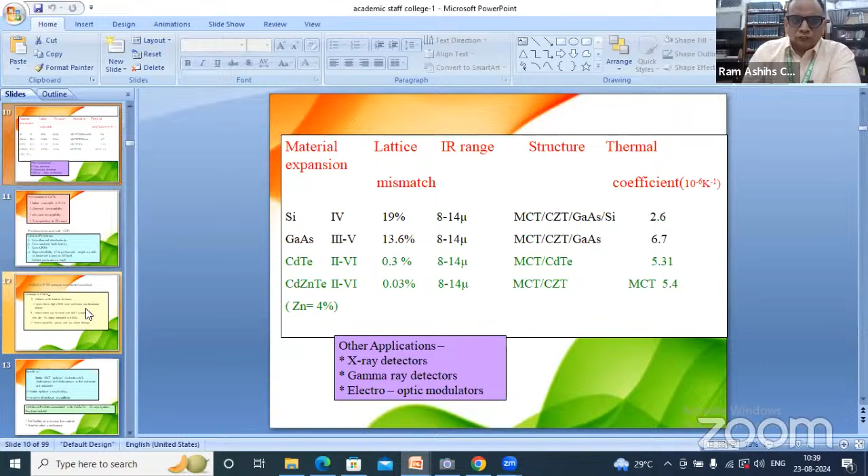Advantage of cadmium telluride is that the lattice mismatch is 0.3%, it is chemically and physically compatible, and it is transparent in the IR region. The problem associated with cadmium telluride substrate is low thermal conductivity, low stacking fault energy, low critical resolved shear stress, and reproducibility is the main issue. And large diameter single crystal or large grain size is the main impediment of the growth technique.

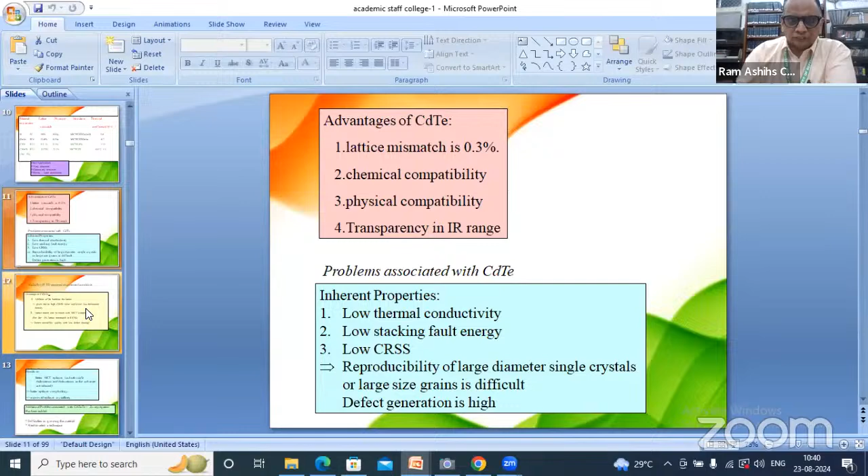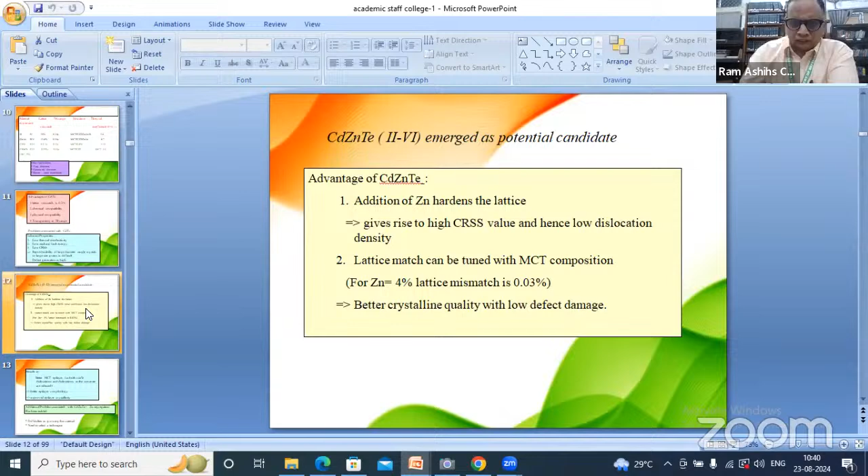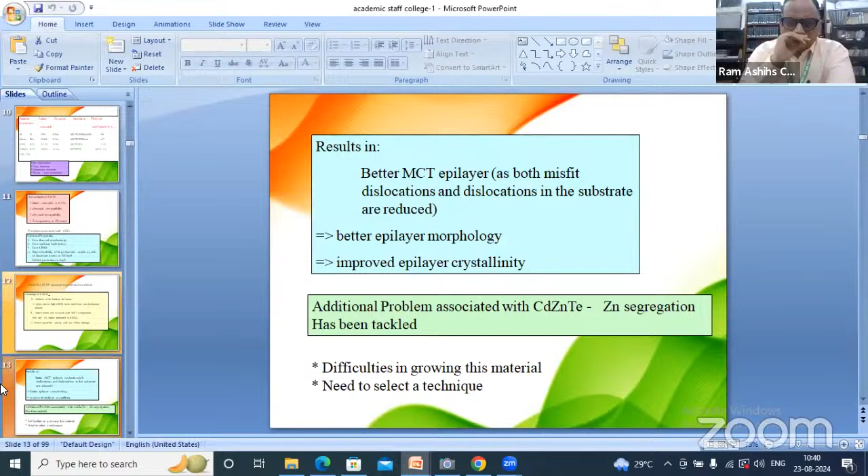Nowadays, cadmium zinc telluride emerged as a potential candidate for the substrate material. Here, zinc with 4% is suitable for MCT epitaxial layer growth, and this gives us better crystalline quality with low defect density. And zinc segregation is resolved with uniform distribution through in situ annealing of the crystal during the growth process.

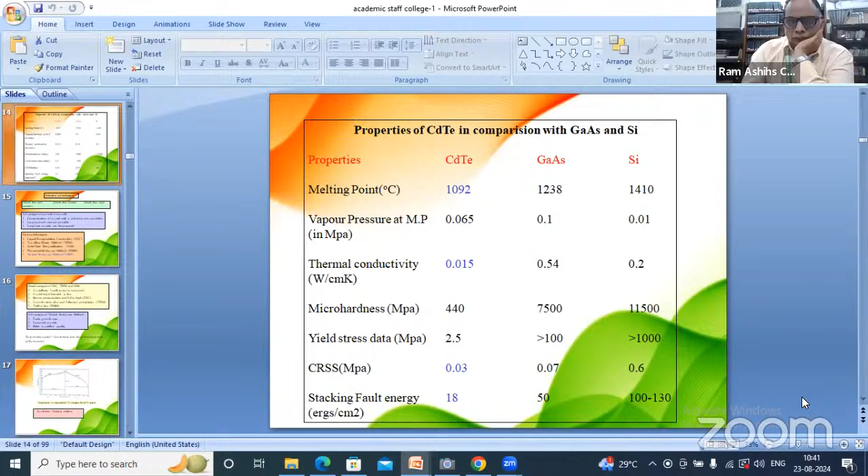These are some parameters of the cadmium telluride, gallium arsenide, and silicon crystal. Now, these are the advantages of growth from melt. Contamination of the crystal with solvent is not a problem, and large growth rates are also possible. Large size crystals can be prepared with this technique, and other techniques are the liquid encapsulated Czochralski method, traveling heater method, and solid state recrystallization method.

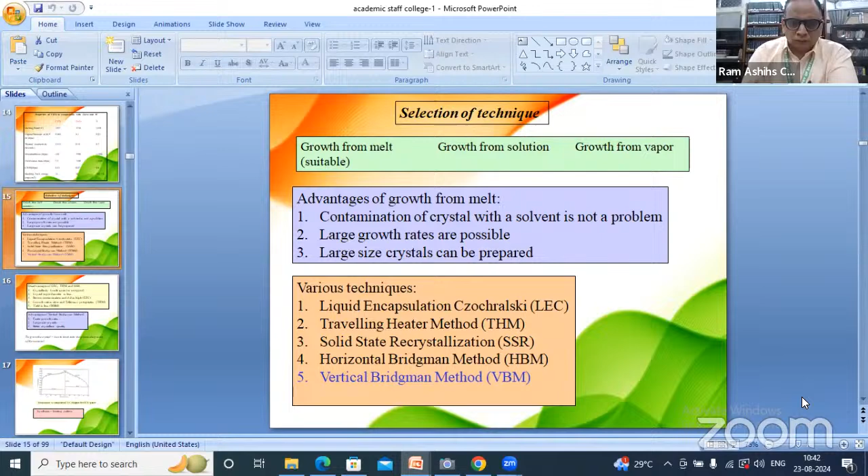In Bridgman method, two methods are there: horizontal Bridgman and vertical Bridgman. For large area grain or single crystal purpose, we are using vertical Bridgman method as a unidirectional freezing method. Other methods for CZT, LEC, traveling heater method, and SSR method, crystalline quality is not good. Crystal ingot diameter is less. In Czochralski method, the boron contamination is very high, growth rate is very slow, and tellurium precipitate is there. And horizontal Bridgman method has half the yield because of the diameter of the crystal.

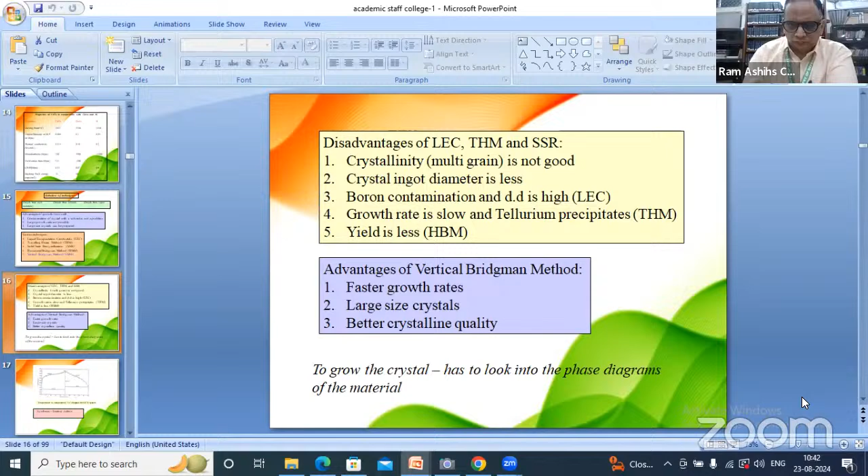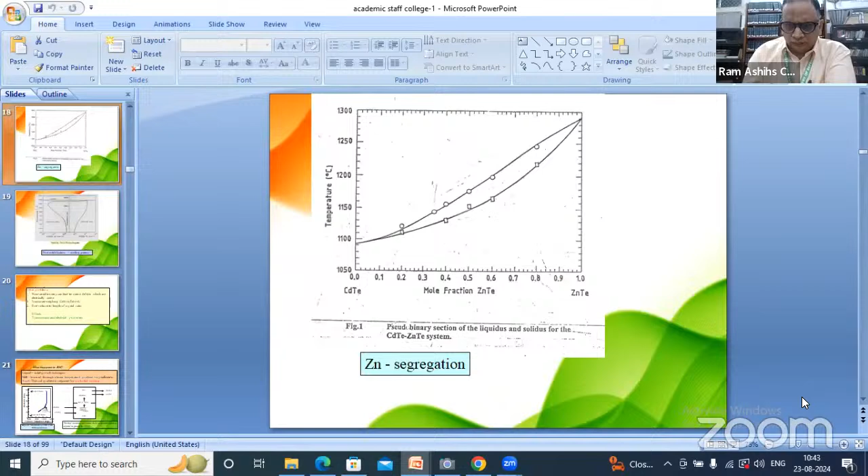Advantage of vertical Bridgman is the faster growth rate, larger size crystals, and better crystalline quality. This is the phase diagram of the crystal growth technique where thermodynamics study is required. This is the theoretical phase diagram of the pseudo-binary section of the liquidus and solidus for the cadmium telluride and zinc telluride system. This is the post-solidification cooling pattern.

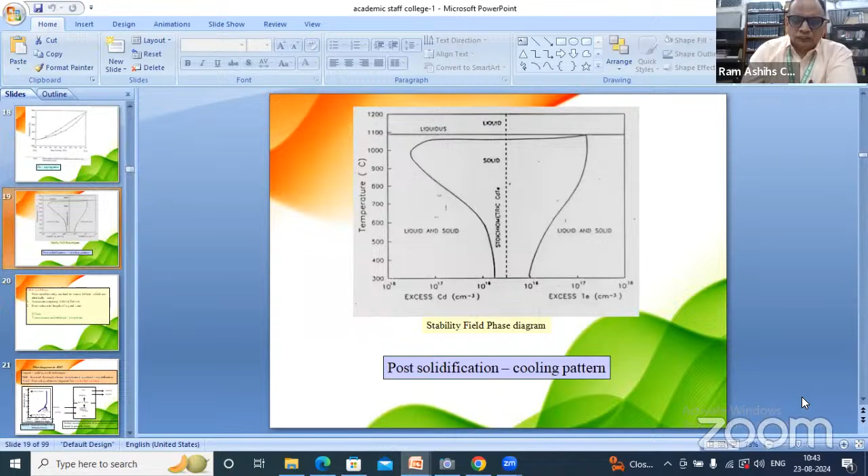By these three theoretical things, we optimize our parameters, and with these things we grow the crystal. This is the required thermal profile of the furnace, and from constant zone to gradient zone we are moving from top to bottom.

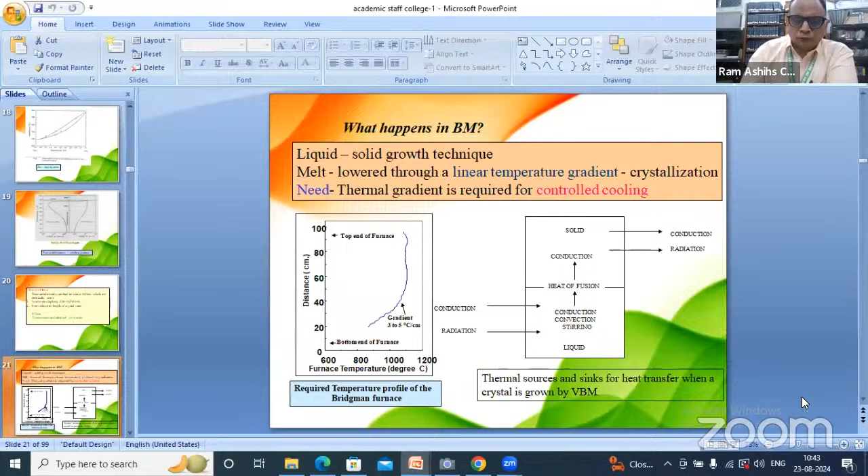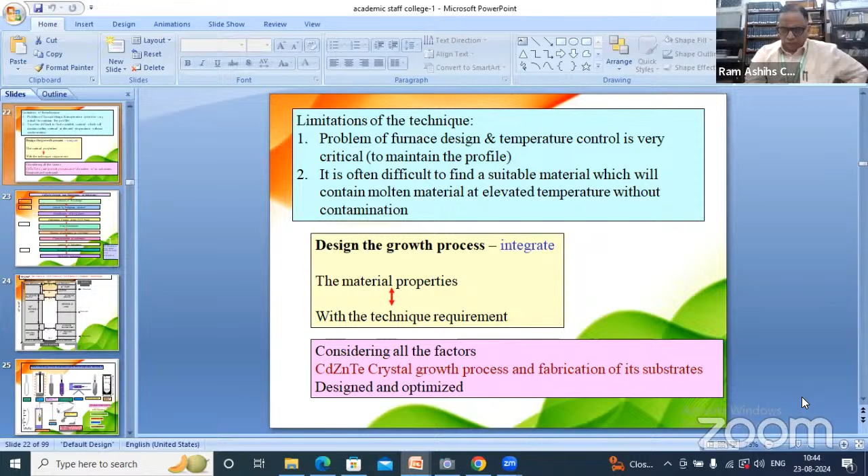Limitation of this technique: furnace design and temperature control is very critical. It is often difficult to find a suitable material which will contain molten material at elevated temperature without contamination. And design of the growth process depends on the material property and technique requirement. Considering all these factors, the CZT growth process and fabrication of substrate are designed and optimized. The procedure is very lengthy for this crystal growth.

Synthesis of polycharge: we are using 7N pure cadmium, zinc and tellurium, and the selected method is Bridgman method. After crystal growth, identification of the 111 plane and orientation cutting along the 111 plane. We are using X-ray goniometer for plane identification. Then shaping of substrate by required size. Earlier we were using 15 by 15 and now 25 by 25 is required for device application. And substrate preparation by lapping, polishing, and epi-ready preparation of substrate for epitaxial growth.

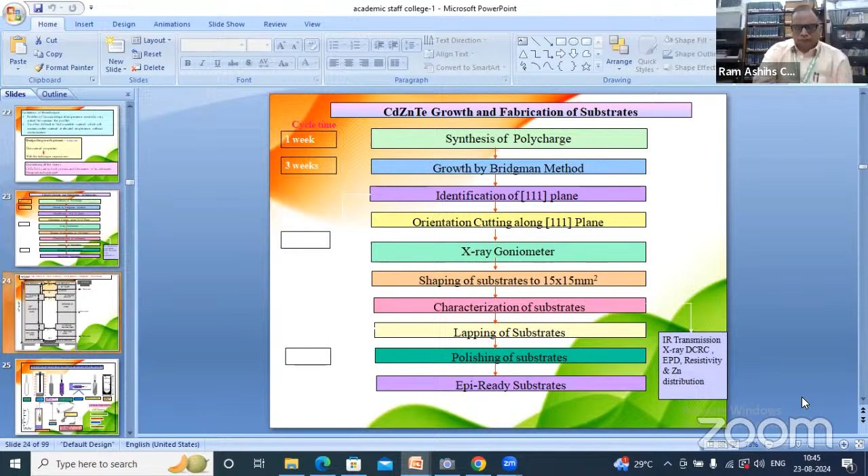This is the design of the old furnace used in the crystal growth process. We have taken a quartz ampule and we do carbon coating in a furnace at 900 degree temperature by cracking of acetone. It is done to avoid the sticking of high purity material with the inner surface of the quartz ampule.

After carbon coating, we do degassing of this ampule, and then we weigh the charge cadmium, zinc, and tellurium with zinc 4% stoichiometrically, place this charge in the ampule, and seal it. After this, we put it in a rocking furnace for 5 days, and after attaining constant temperature, we rock this furnace for mixing the charge.

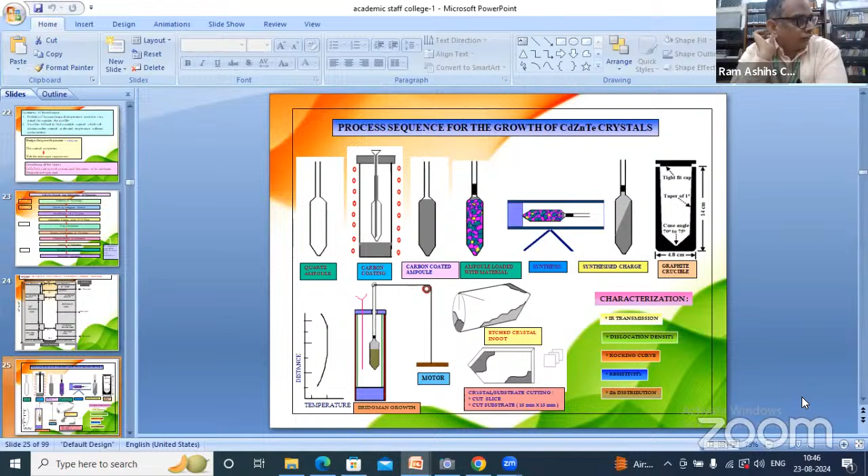This is one experiment. We grow this crystal in a quartz ampule and in a graphite crucible, and nowadays we are using PBN crucible. We were growing in graphite crucible, but carbon contamination is there. Now PBN crucible is giving very good results for the device purpose.

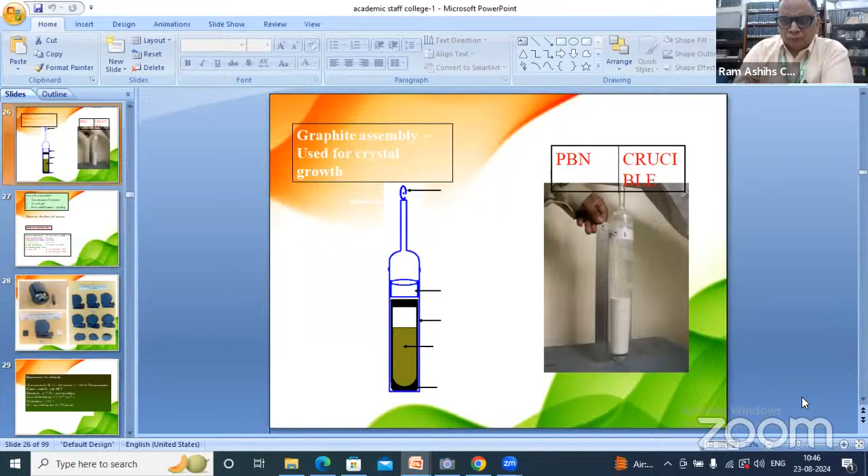This is the structure of PBN crucible for growth purpose. Now the growth parameters, temperature gradient, travel rate, post-solidification cooling, and furnace diameter are given here. Ampule diameter is 45. Temperature gradient is 3 to 4 degrees centigrade. And after lowering, in situ annealing is done at 1040 degrees centigrade for 5 days.

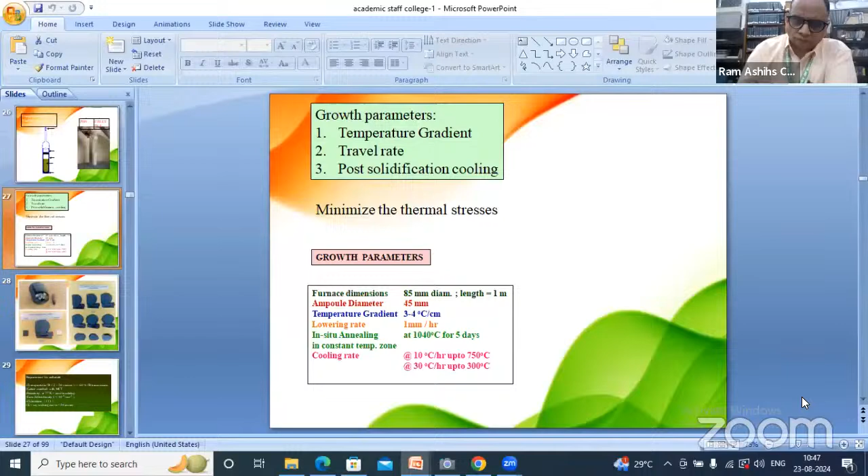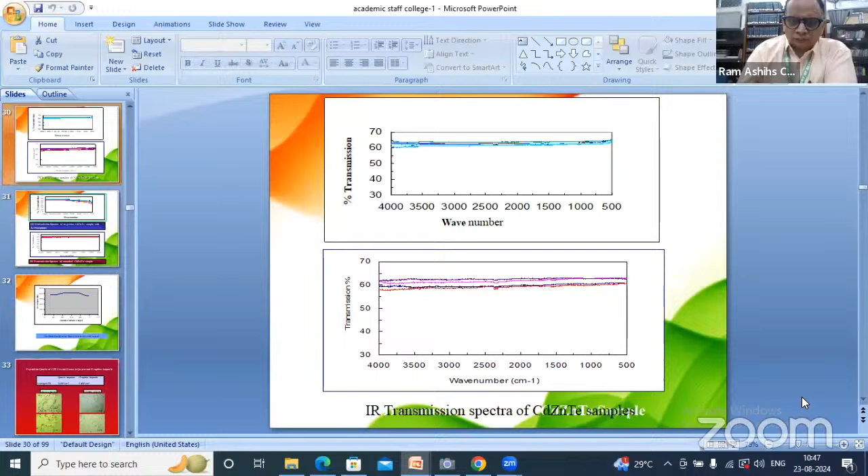This is the requirement of substrate materials. This is the transmission, because this is used in backside illuminated devices. The transmission requirement is 60%. So our substrates are qualified for this transmission requirement. If transmission is hampered, after annealing we correct this transmission.

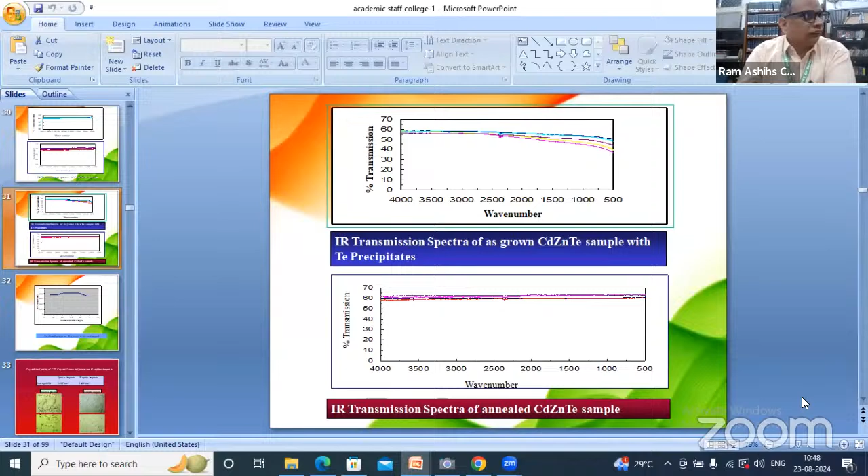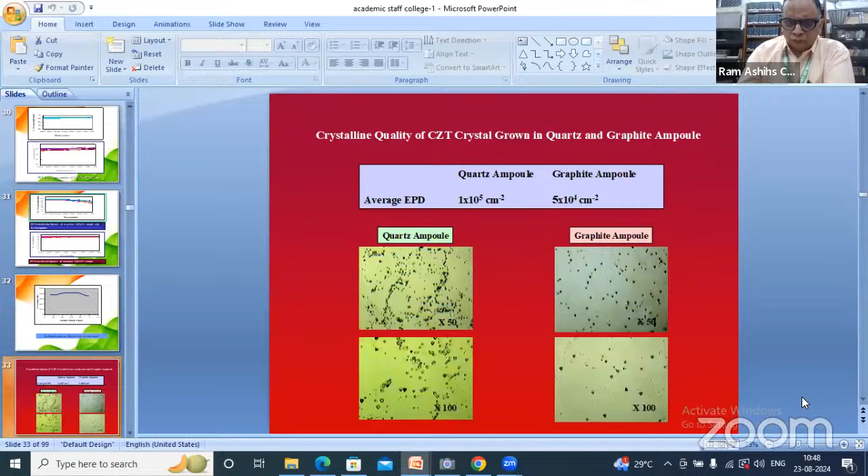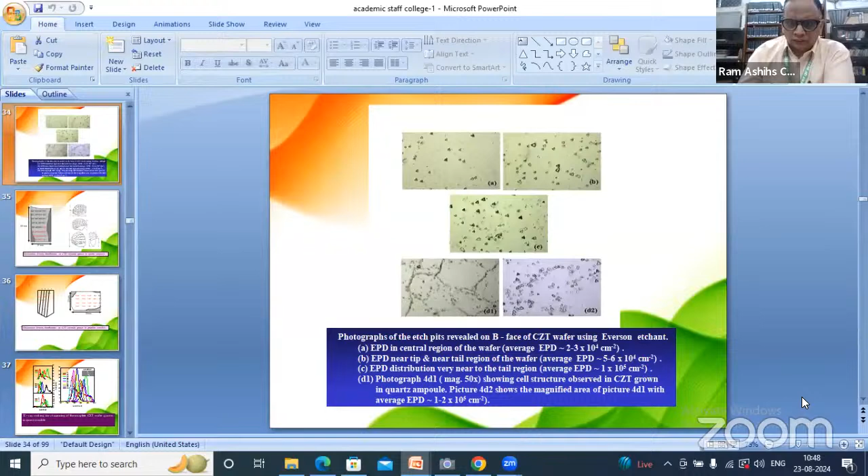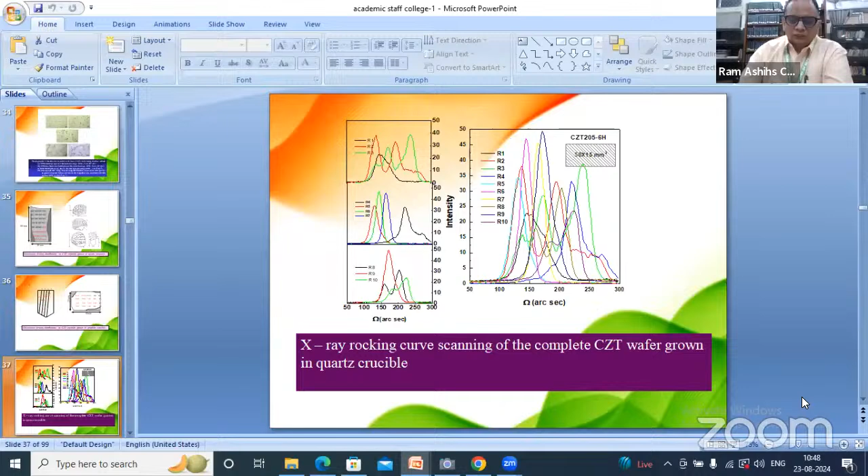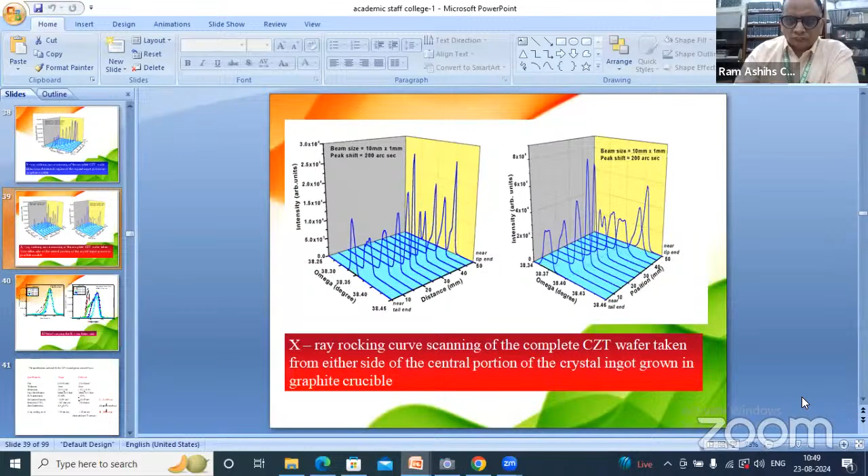This is the X-ray rocking curve. The physical significance of the splitting of X-ray rocking curves is the low angle grain boundaries present in the substrate in one region. This is the perfect single crystalline quality. This is a different beam size, and the splitting, the multiple peaks, shows the tilted low angle grain boundaries present in the substrate. These are also analysis.

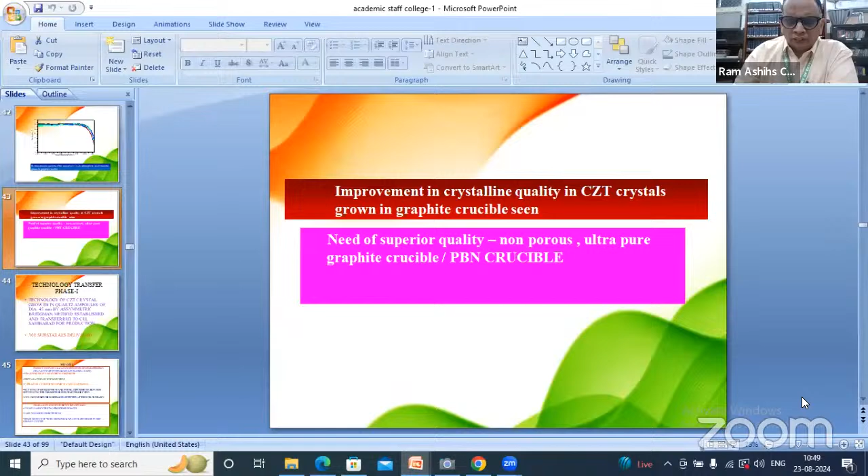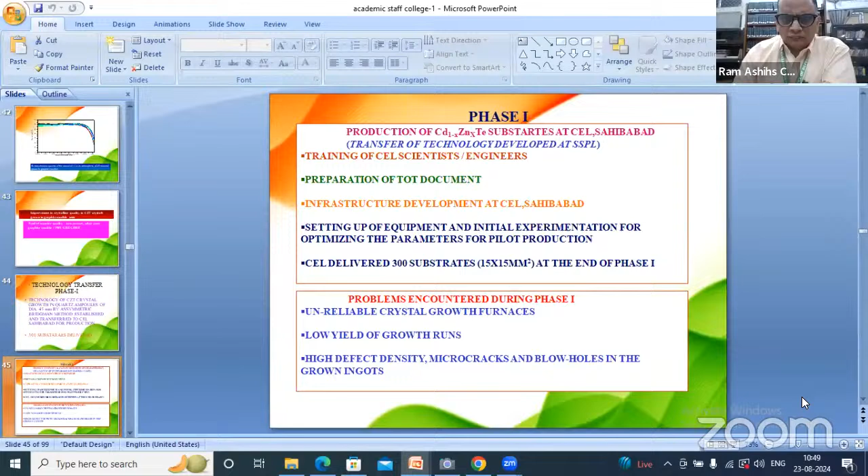For improvement of the crystalline quality, we are using nowadays PBN crucible. This technology we have transferred to the Central Electronics Limited, Sahibabad, and in two phases we are changing the technology of the diameter of the crystal, and nowadays we have transferred the technology of growth of CZT substrate in PBN crucible.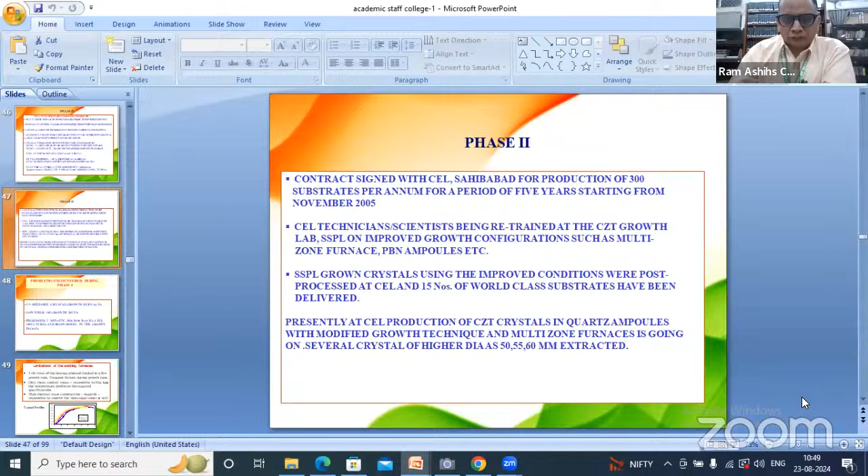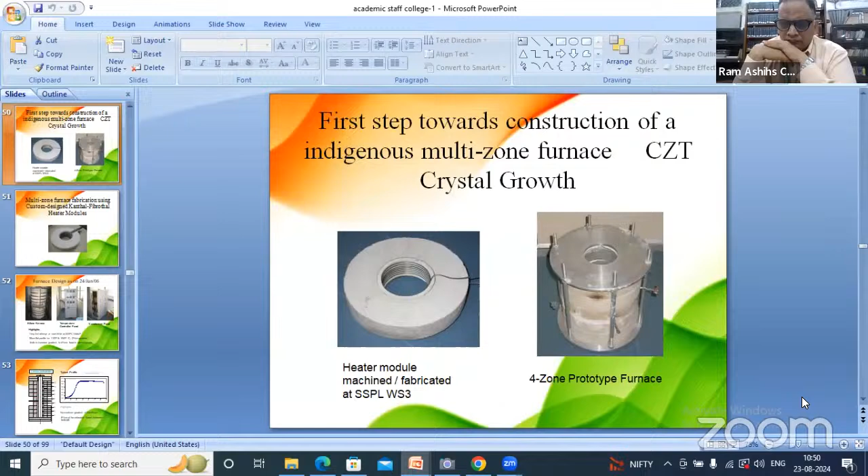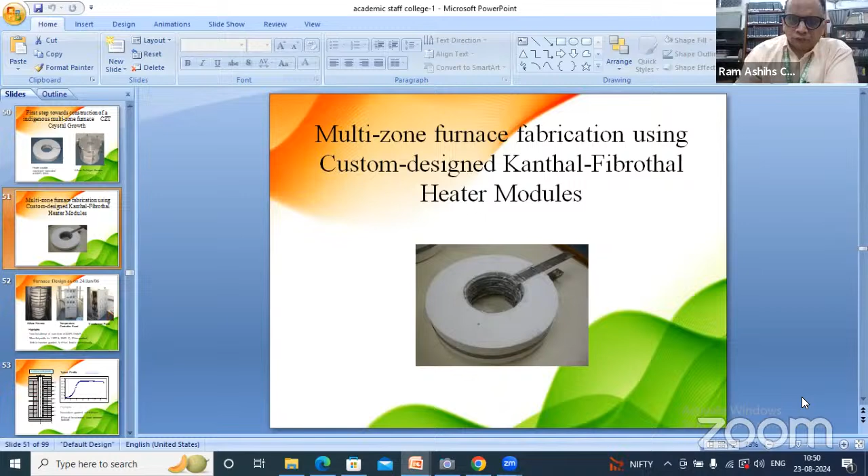For the temperature requirement, the first step is the construction of an indigenous multi-zone furnace. This is the heater module, which nowadays we made from Kanthal Fibrothal module and Kanthal wire. And this is the 1-zone and this is the 3-zone furnace, a 4-zone prototype furnace we made. For multi-zone furnace, this prototype works. Then we optimize the parameters, and this is one module of Kanthal Fibrothal heater module we made.

By using 9 such modules, we made a multi-zone furnace, a 9-zone furnace, with in-house temperature control panel and transformer panel here. So the furnace problem is minimized, and this gives the required profile. It is done because we are not getting the Bridgman furnace from the US and other countries because of the sanctions. And this is a strategic material, so people are not giving support or providing the infrastructure for this activity.

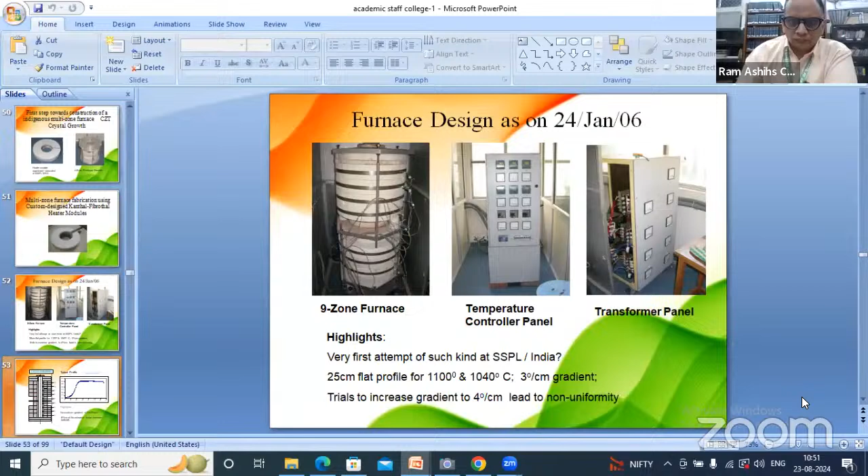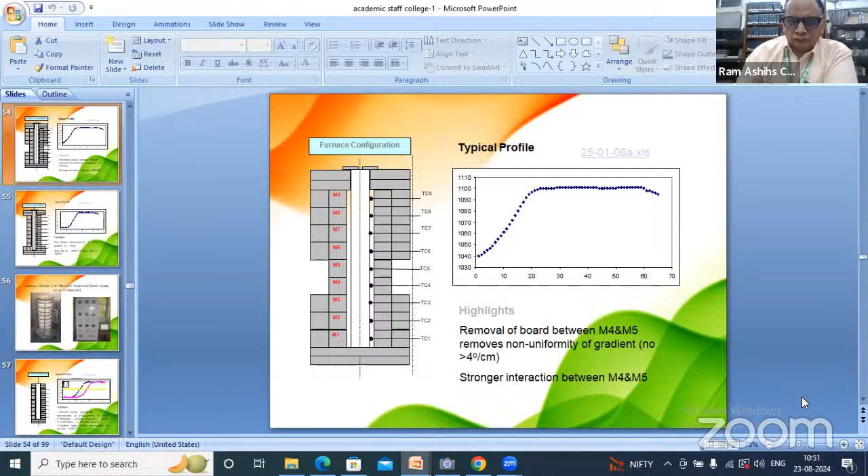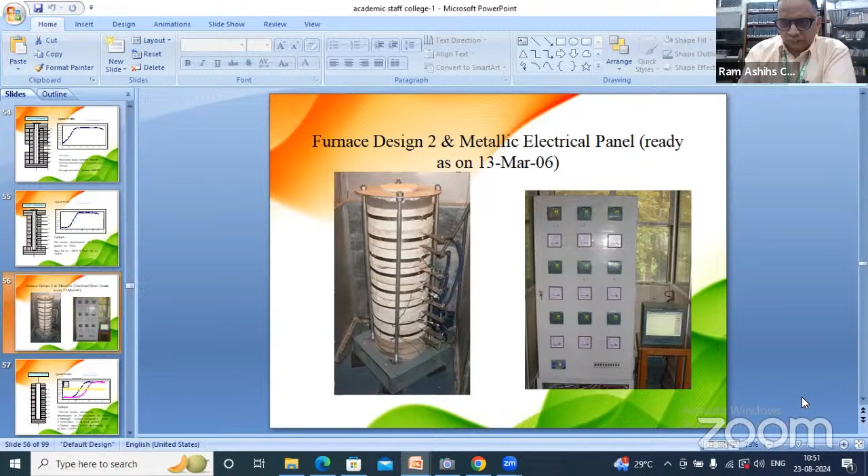This is the block diagram of the 9-zone furnace, and the temperature profile is there. This is also a temperature profile, constant zone and gradient. This is the final design. There is a low thermal mass of the external bodies. By this design, we transferred the technology of furnace fabrication to the Central Electronics Limited, Sahibabad.

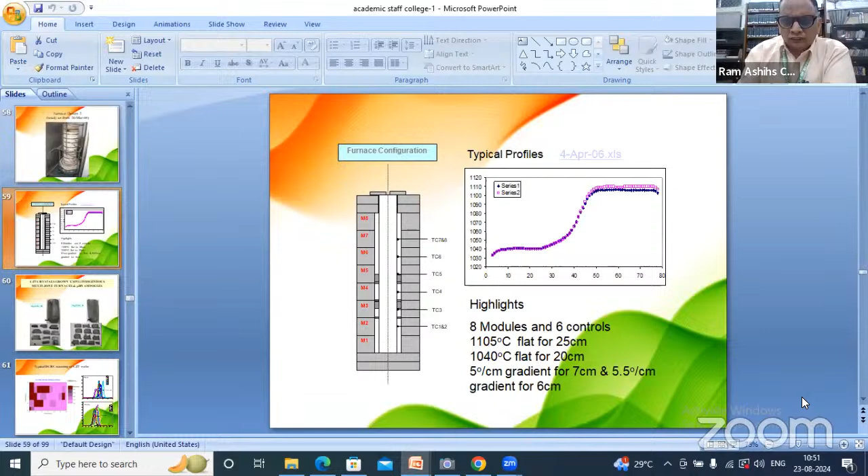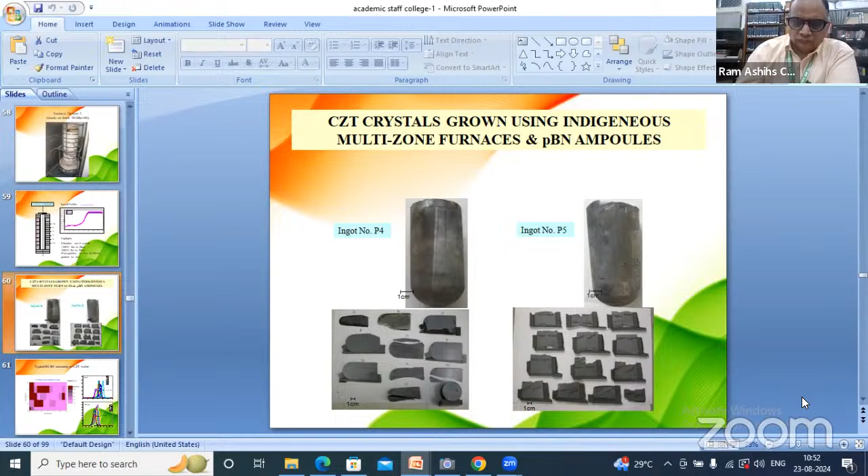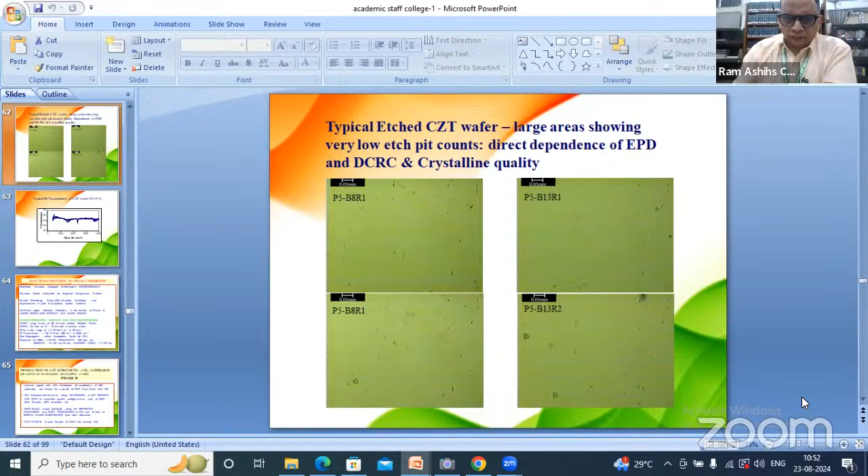These are the characterization results.

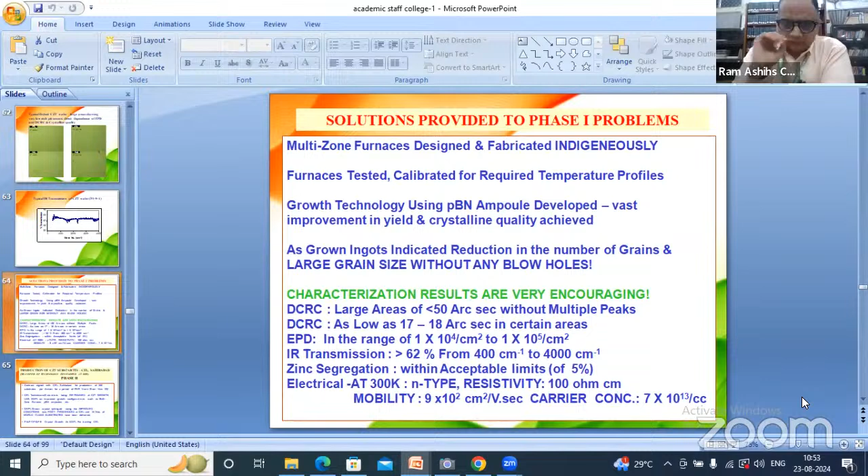Now the contract is signed with Central Electronics Limited, Sahibabad, for 5 years and 300 substrates per annum. We are the user because SSPL is the semiconductor lab. We have developed the technology and transferred it to Central Electronics Limited.

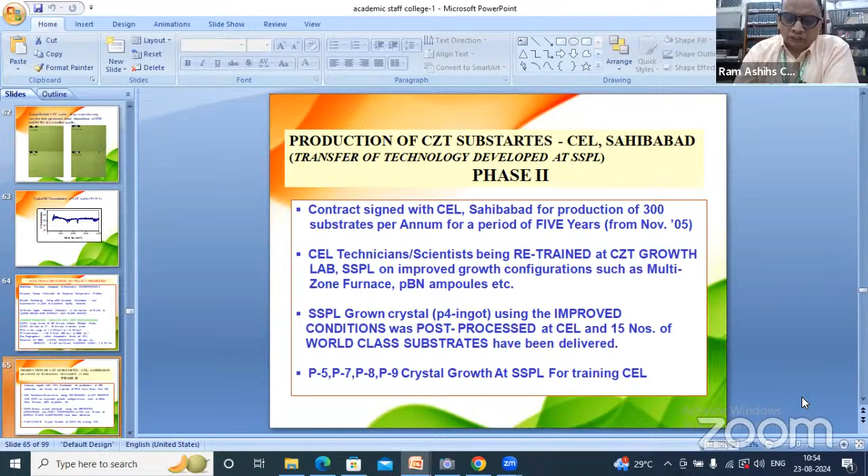Further, large size PBN growth is carried out, and Central Electronics Limited production started in Quartz Crucible with large diameter also, for optimizing the parameters. Action is also taken for setting up two multi-zone furnaces for large diameter CZT crystals.

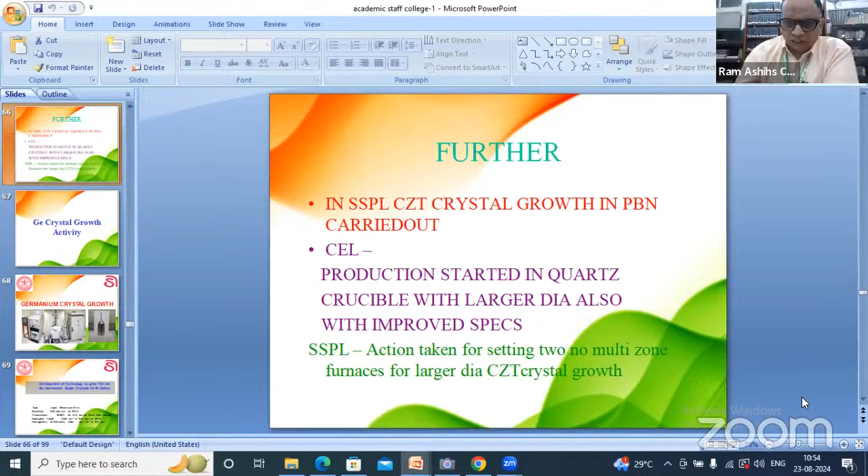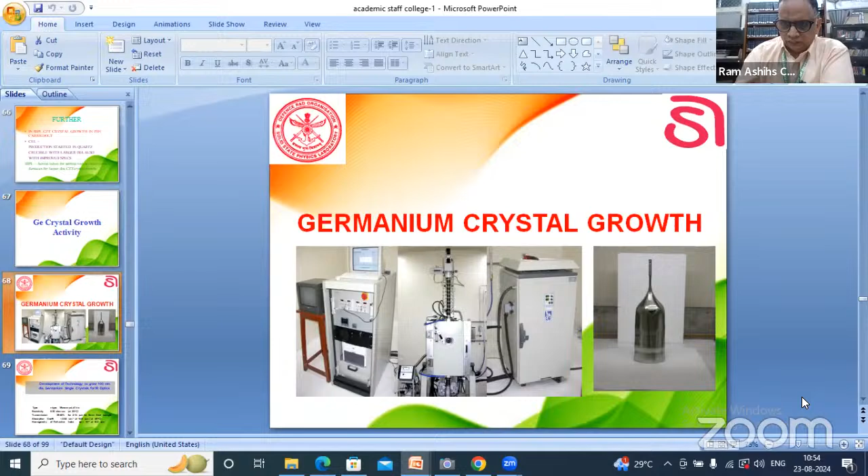Now the other activity is gallium arsenide crystal growth. For space applications, we are growing gallium arsenide crystals.

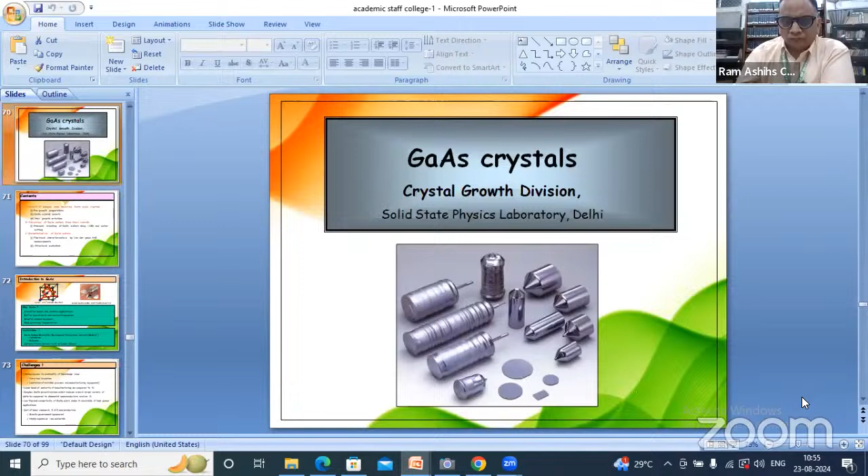The growth of undoped semi-insulating gallium arsenide crystals requires pre-growth preparation, gallium arsenide crystal growth, and post-growth activity, including fabrication of gallium arsenide wafer from the crystal, because it is a huge crystal.

So precision orientation of the gallium arsenide wafer along 100 and wafer cutting is required. The characterization of the gallium arsenide wafer, electrical characterization and structural characterization, is done at SSPL.

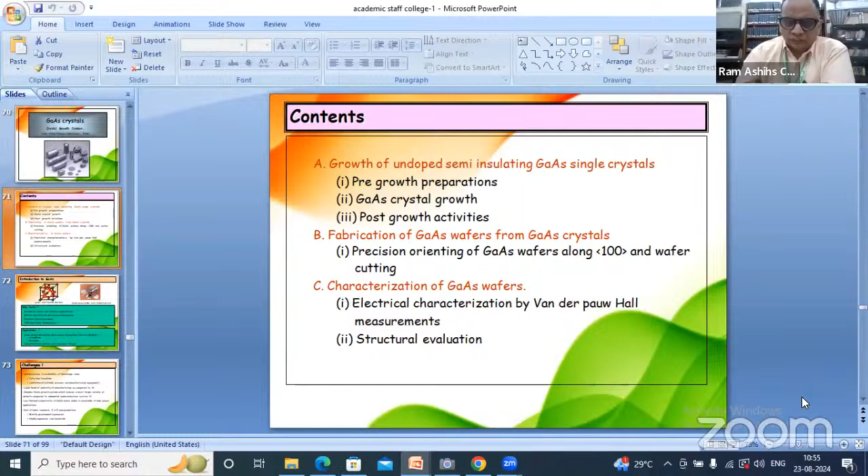Gallium arsenide is crucial for space and military applications: better operational microwave frequency, greater computing speed, and high operating temperature. The application is the gallium arsenide based MMICs used in satellites and missiles.

The devices made by SSPL and produced by GAETEC Hyderabad are used by ISRO in their space program. We have some commendation certificate from ISRO also.

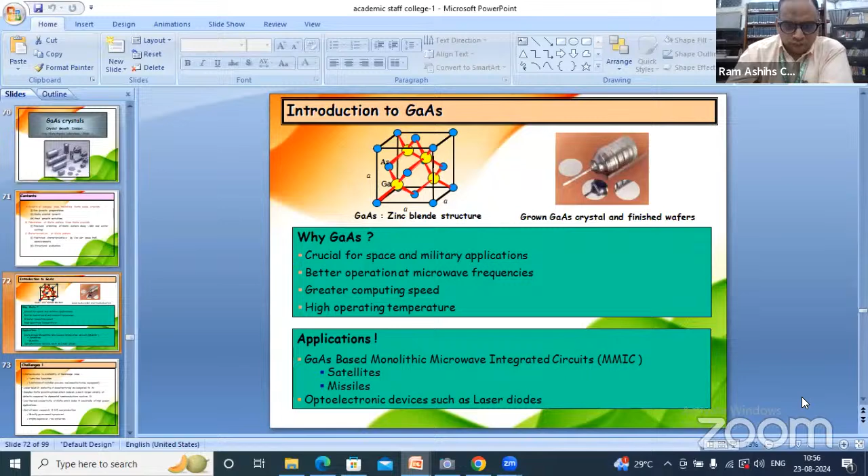Now the challenges: limited access to knowledge with very few foundries available, limitation of suitable process and manufacturing equipment, and low level of maturity of manufacturing as compared to silicon, because silicon foundries are very much available in India.

For gallium arsenide crystal growth, a complex growth system is required, inducing a much larger variety of defects compared to elemental semiconductors such as silicon. Low thermal conductivity of gallium arsenide makes it unsuitable for high power applications.

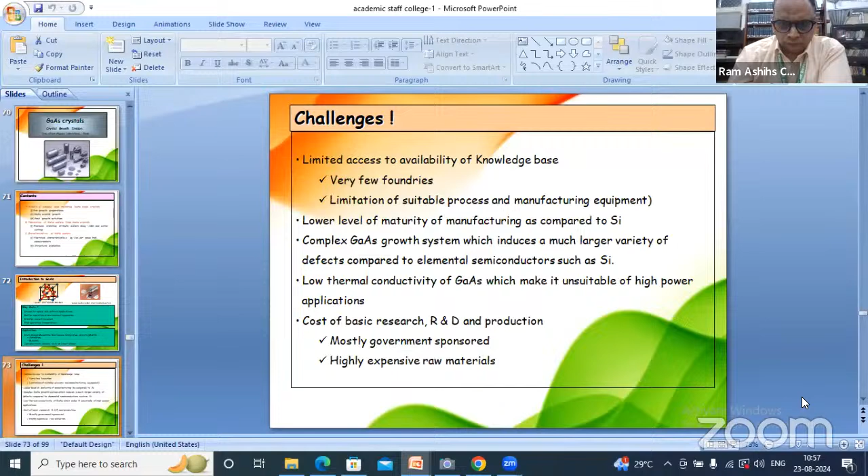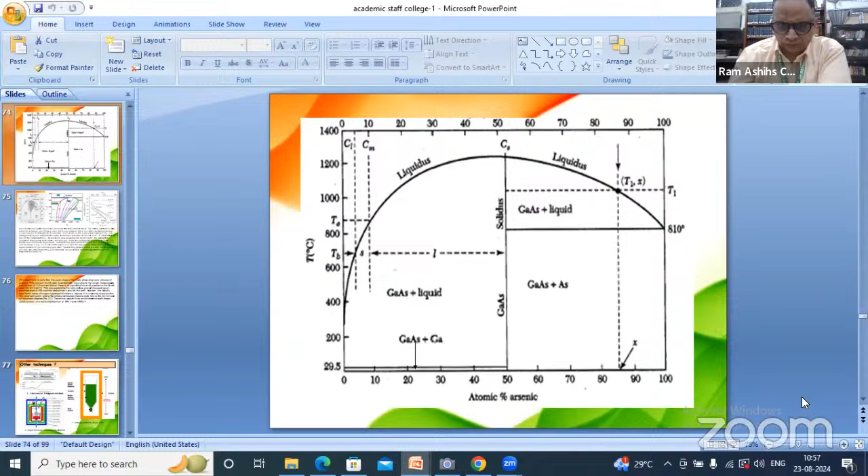Cost of basic research and R&D is mostly government sponsored, and raw material is highly expensive. This is the textbook diagram of the gallium arsenide crystal.

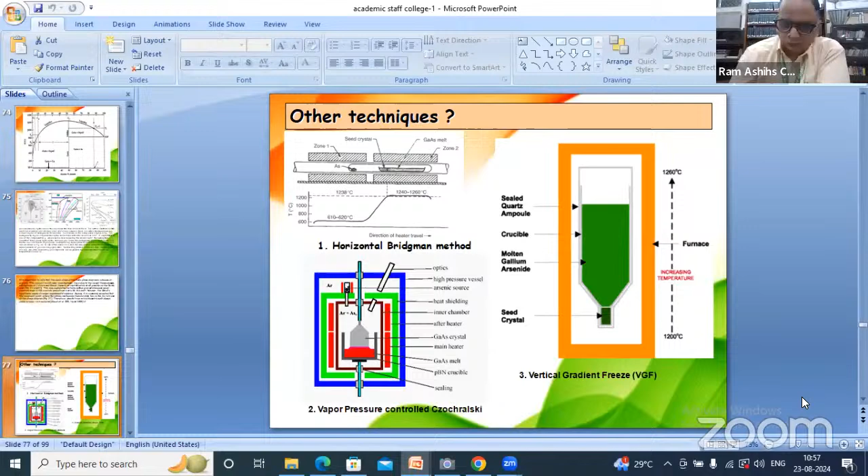Other techniques for gallium arsenide are horizontal Bridgman and vertical gradient freeze method, and vapor pressure controlled Czochralski method. Nowadays we are using the Czochralski method for growth of gallium arsenide crystal.

Gallium arsenide activity flow chart: crystal growth, then wafer fabrication and wafer characterization, and we submit this wafer to other sections for device fabrication.

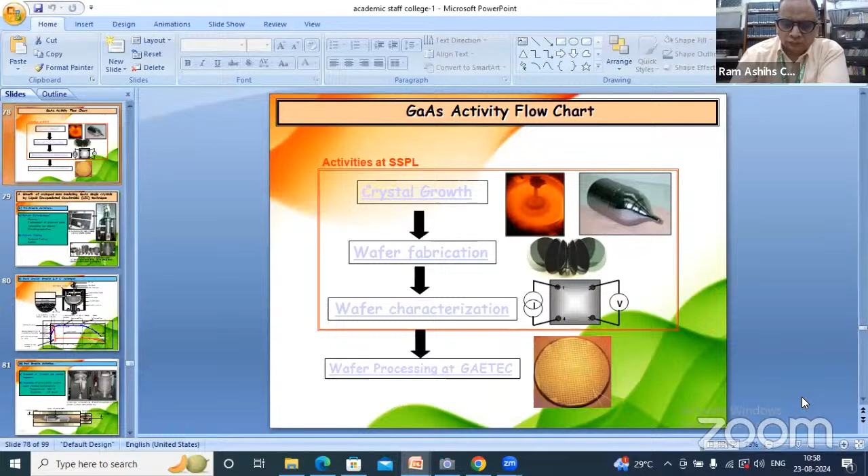This is the Czochralski growth furnace for gallium arsenide, and graphite furniture is also used for the inner part of the furnace.

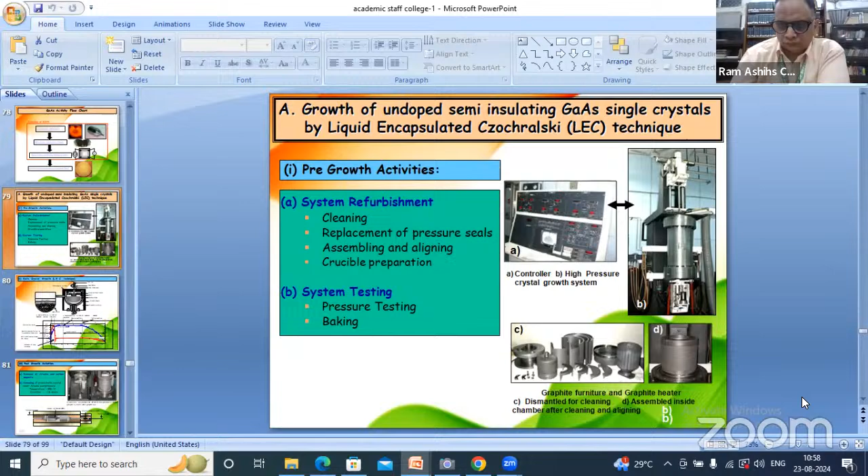This is the gallium molten and arsenic solid, with B2O3 solid, and by rotating and using the seeding technique, we grow the gallium arsenide.

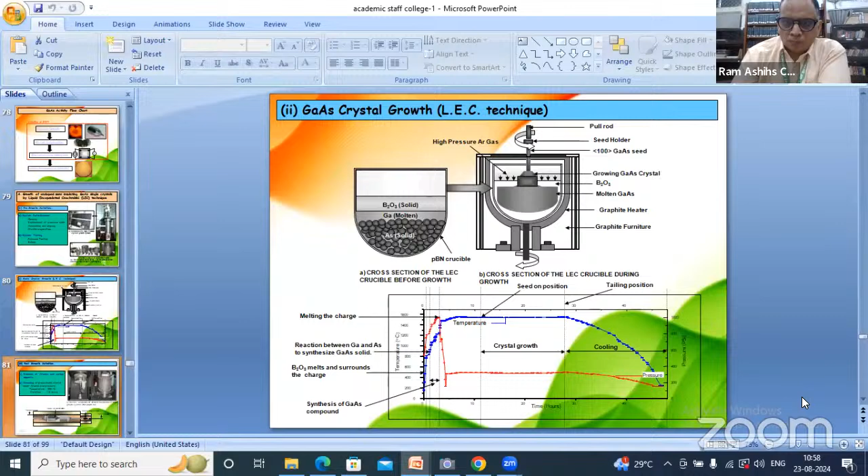This is some other part of the crystal growth furnace. This is the ingot, the grown crystal.

By orientation using the X-ray goniometer, in the 100 plane, we do cylindrical grinding and flat orientation, flat identification and flat grinding. Then wafer cutting, edge rounding and lapping polishing, and then finished wafer for further use.

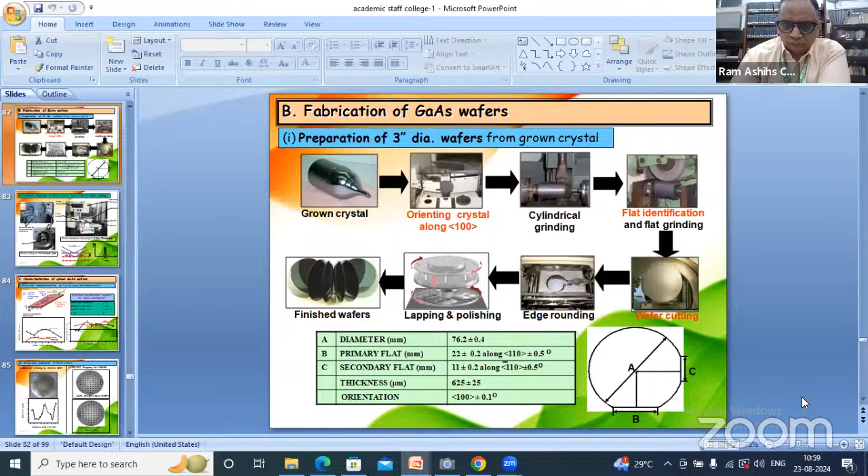This is the precision orientation of gallium arsenide crystals along with wafer cutting. Some other department does characterization and gives the results to us. These are the various characterization results.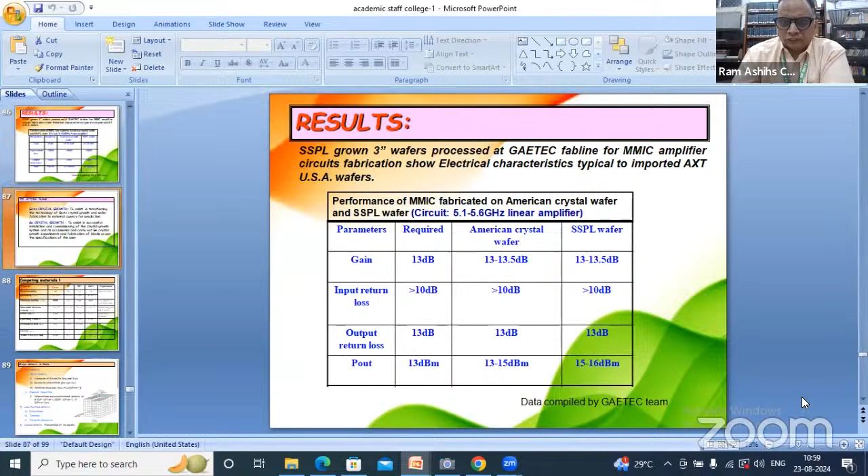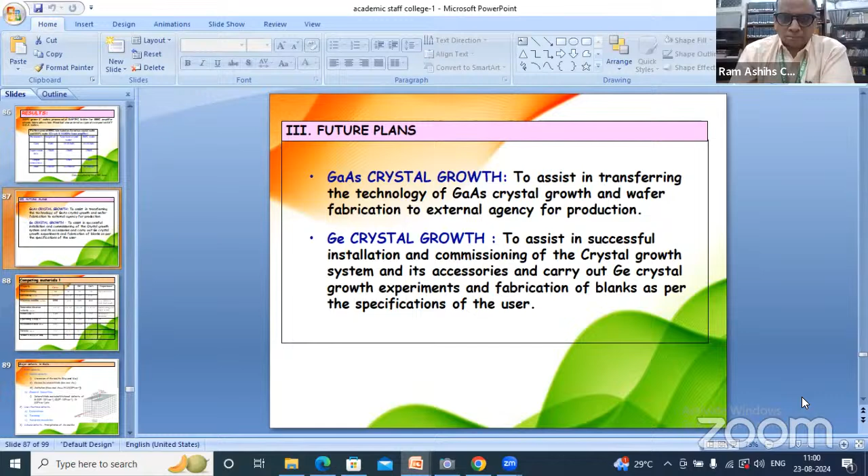So as academia, how do you associate with DRDO? In DRDO, there are plans from ER and IPR. You can submit a proposal to DRDO with your field of interest, and by collaboration, you can start the research work.

For students, we are providing training as an academic activity, for 3 to 4 months, 6 months, and also 1 year. If anybody wants to contact for training, contact the respective director of the lab, and we will support them.

Nowadays DRDO is associated with academia. If faculty members want to take a project from DRDO, they can visit the DRDO website, go to the ER and IPR section, and submit a proposal for research related to defense applications. Then they can collaborate with DRDO.

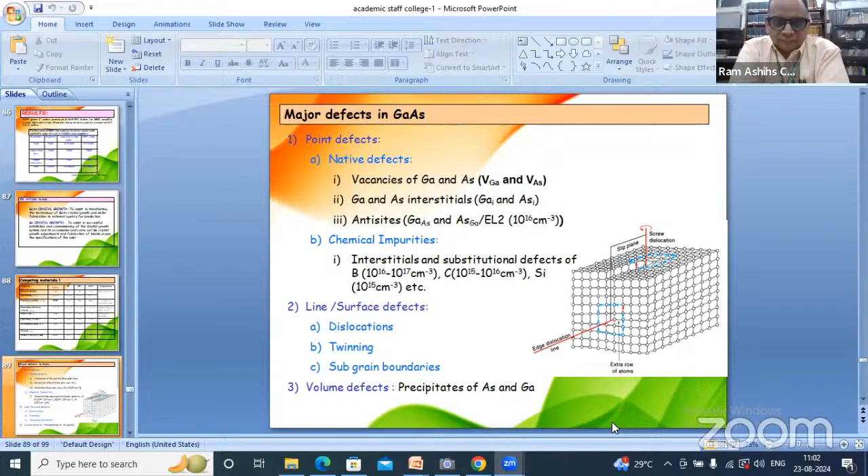Thank you, sir. Thank you, sir. Welcome. This was very informative and interesting, thank you sir. Very informative lecture.